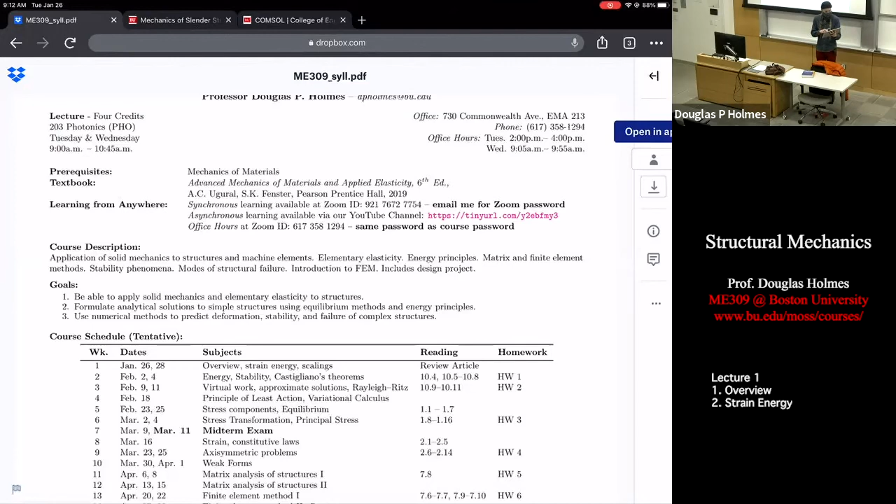The goals are listed here. Here's the course schedule, kind of a rough one, in terms of things might change as I'm shuffling the order. You can see it here, like in the reading listed on the syllabus, it starts out in chapter 10 and then goes back to chapter 1. That seems kind of weird, but there's a method to that madness.

I kind of like the way the class starts now. It helps provide more of a conceptual understanding by using ideas from energy, and how we understand principles of minimum energy, and energy tending towards being a minimum. Using that concept, you can actually do quite a bit.

At the moment, I'm looking at 2 exams, a midterm and a final. There's a chance if I can figure out how to come up with a good project plan, we could switch out that final exam for a project that involves a little bit of math, a little bit of finite element work to kind of tie things together. I'm hoping to get to that point because I think that's a more useful use of your time than an exam.

At the moment, we'll kind of live with this plan of having these 2 take-home exams and some homework assignments throughout. But I'm really trying to see if I can come up with a couple of good projects that could possibly take the place of those. Because I think at this level, as most of you are seniors, I think you'll get a lot more out of doing some math, tinkering with COMSOL, trying to figure out some problem that you're interested in. I just need to come up with some project outlines that are the right difficulty level.

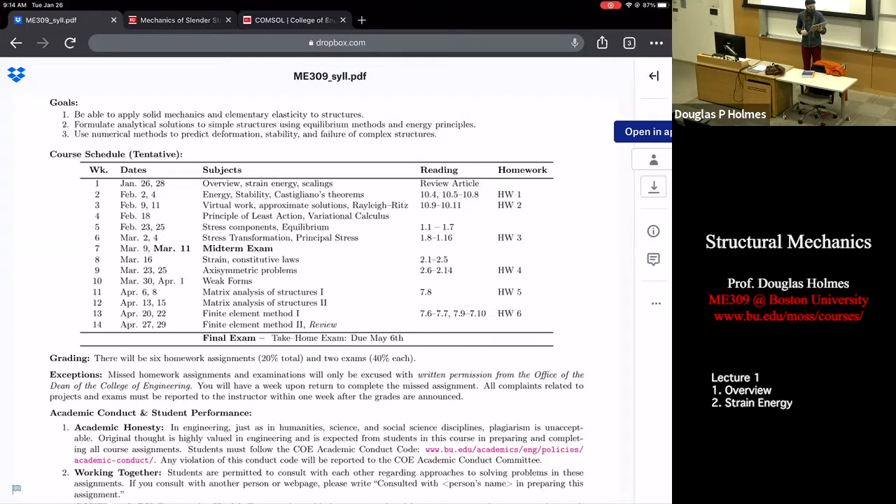All right, let's scroll down here. There's a ton of information in academic conduct, student performance. I feel like early on in your college career, there's a lot of emphasis on just grinding to get the best grades you can possibly get. And I think somewhere from the beginning to the end of your senior year, into your graduate career, there's a mindset shift where you realize, oh man, I gotta know some of this stuff, I want to learn this material. And that knowledge ends up becoming a little bit more important than the grade attached with it.

And I have on here, work together. If you want to work on a homework assignment together, work together. Just let me know that you're working together. I want you to leave this class with an understanding of structural mechanics. That's my goal.

I'm someone who's going to be less of a stickler for grades and more of a professor who's interested in seeing you demonstrate mastery of a topic, or seeing you be aware that you don't yet have mastery of this topic and you'd like to get there, working with me or with your peers to understand what you don't understand yet. I'm still trying to find the best ways to balance understanding that we grade your performance, but in my mind, I really want to see mastery as the goal. I want you to master this topic because that's what's going to be expected of you. If you leave here, you're either going to go to graduate school or get a job, and they're going to say, oh, you took structural mechanics, you know how to do this, and I want you to know how to do whatever that thing is.

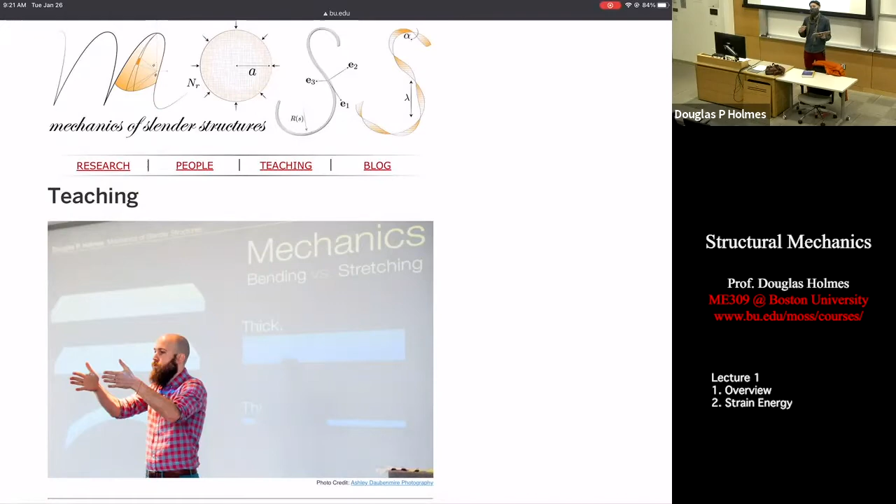I'll put this link on my syllabus as well before I email it out to everybody. I'll try to post things here, including the syllabus, videos from our class—you can get a sense here.

This is from the fall, a different class, but I posted videos and a PDF of the notes I'll be writing on my iPad here. I'll post the PDF of these notes on this website, along with a link to the YouTube channel and some code we'll end up using throughout the semester.

We typically do some stuff in Mathematica. If you've never used it before, I'll give you a little primer on that. And the other thing I'm trying this semester, which could work and be awesome or could be a disaster—we'll find out—is incorporating more work with COMSOL into the class.

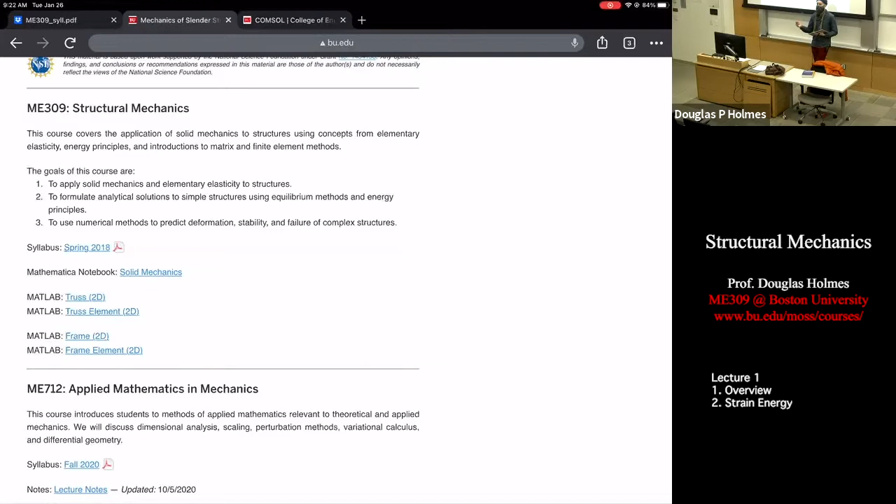I believe all of you can access COMSOL through Citrix. We're in a class, so we have a class license, and I believe the primary one for us would be the structural mechanics module. They're all available, so you can use all of them. Just Google Citrix and COMSOL for BU, and it'll tell you how to access it.

I wouldn't worry about it right away, but this is something I'm trying to build in to give you a little experience analyzing stress within structures using a finite element solver. I feel like many of you have encountered COMSOL in, say, fluid mechanics. If you've never encountered it before, you'll just be a hair behind me—I'm pretty terrible at it but learning. We'll see what we can do to make it a useful tool to help our learning here.

All right, what questions do you have for me? I've been talking nonstop.

So yeah, I know you were talking about maybe changing the final to a project, but it also, in the course description, includes a design project already. So would that be two projects? No, it would just be one.

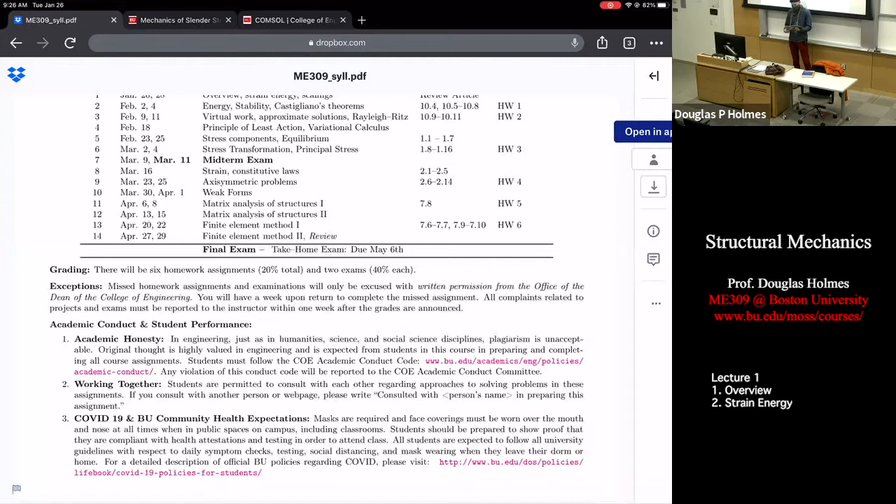How similar are the exams to the homeworks? That's a good question. I would say pretty similar, although the homeworks tend to be very technical - here's a structure, here's the loading, calculate the stress in this direction or the deformation here. I usually try to add some conceptual questions to the exam, to get at what do we mean by this concept, what happens if we were to change this to that, how would that qualitatively change it. So the homeworks are typically entirely quantitative - calculate a stress, calculate a deformation. The exams, I do a mix of that with some conceptual questions. So fairly similar, but I like to be able to ask about conceptual ideas on these exams, because I feel like that is, in a lot of ways, more important than the kind of technical calculations. So that's a good question.

All right. So I feel like I've given you already a little bit of a sense of what is structural mechanics. It sits somewhere between mechanics of materials and linear theory of elasticity. Typically, what we're thinking of when we think of structures are three ideas. We're typically thinking about trying to analyze their strength.

Strength is typically a material concept. It's saying, if I apply this much load to this object, we know from mechanics of materials it's going to lead to the structure itself building up stress within there. And then we also know that there's some ultimate stress at which this structure will start to fail. Maybe it'll yield, maybe it'll fracture, but there's usually some sort of material limit to the amount of force you can apply to an object. So this is typically characterized by how well that material resists permanent deformation.

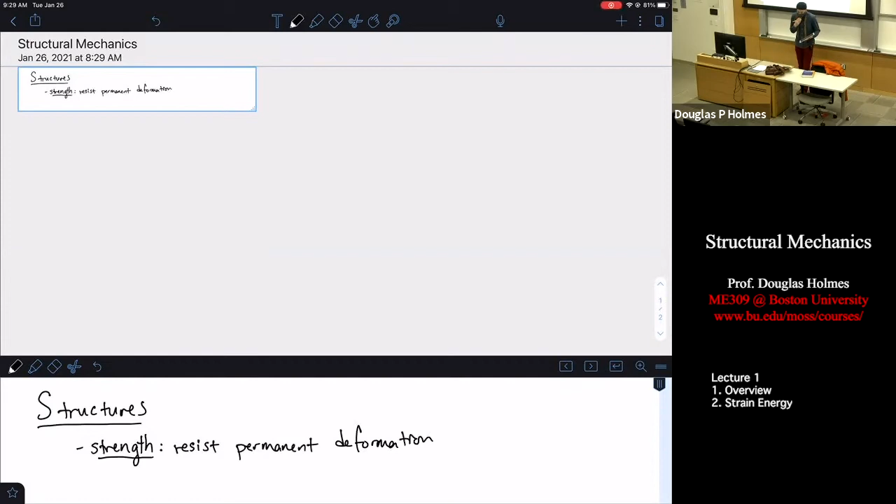You usually see permanent deformation, something like plastic yielding, or brittle fracture, etc. And like I said, these are typically something that emerges from the material properties. The material, we would say, behaves elastically if under that loading it doesn't exhibit any permanent deformation - or there are more complicated ways to make that distinction. But for right now, think of it like a spring: if I pull on it and let it go and it goes back to its original state, it deformed, and we'll say it deformed elastically in that process.

That distinction is kind of important, because the other two things we think of when we think of structures are stiffness - this is really a measure of how the structure resists deformation, or in some cases deflection. Kind of the same word, but usually used in slightly different contexts. You can see that in the stiffness case, really we're talking about shape changes, deformations. So the stiffness of a structure is typically related to the geometry, and in that case, the linear behavior of the geometry.

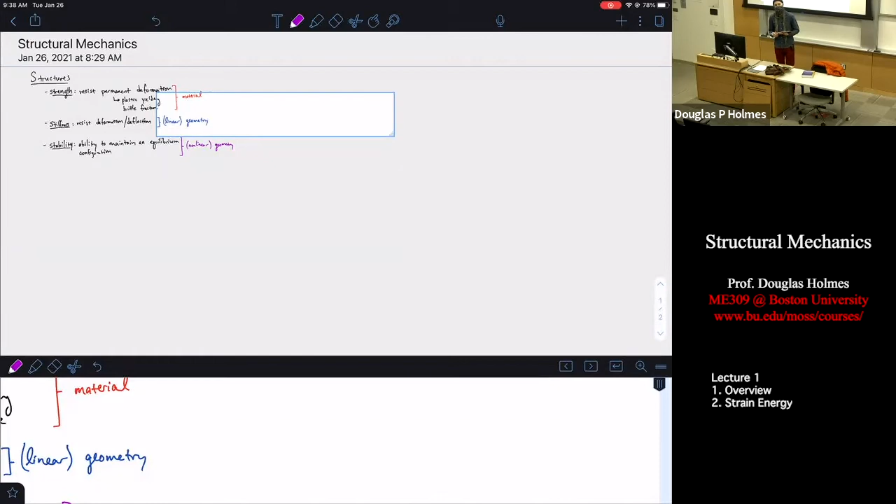There's typically two ways that we can evaluate these properties of structures. They're equivalent, and depending on the situation, depending on the problem, it might be advantageous to use one approach over another. These two approaches...

One of them is pretty familiar - it's the stuff that's been beaten over your head for the last 2.5 years of undergraduate career, which is the method of equilibrium: sum of the forces equals 0, or sum of the forces equals mass times acceleration. We can use that, draw a free body diagram, calculate what the force is or what the stress is. This is referred to generally as the method of equilibrium.

We typically have - there's technically 4 sets of equations, but we generally ignore the 4th one until you're at a really advanced graduate level. So the 3 others are equilibrium equations - that is what I was just saying, those are your sum of forces equals 0.

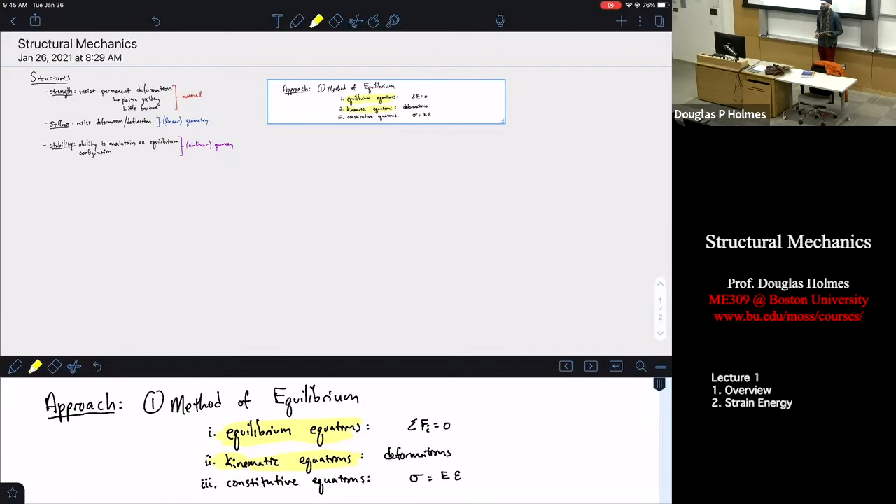I think it's vital for you to learn all these things, and we will a little bit through the semester. But I want to introduce you to something that's probably a little less familiar. And this is a second approach, which are all based on energy methods.

I was not trained as an engineer. I was trained as a scientist, and trained as a scientist, you're very comfortable thinking about the concept of minimum potential energy. We always think about energies. We think about free energy. We think about the energy in a gravitational potential, energy of a molecular bond forming or breaking. And what's nice is that these methods are equivalent. They're really connected. And you're going to see that we can use the energy methods to derive the equations of equilibrium.

They're very equivalent methods, but they each have their own advantages and disadvantages. For the energy methods, it becomes, in my opinion, easier to start to estimate what's going to happen, to start to approximate a solution. If you can't solve it exactly without going to a finite element solver, maybe we could approximate it and see if this is a reasonable structure that we're designing here.

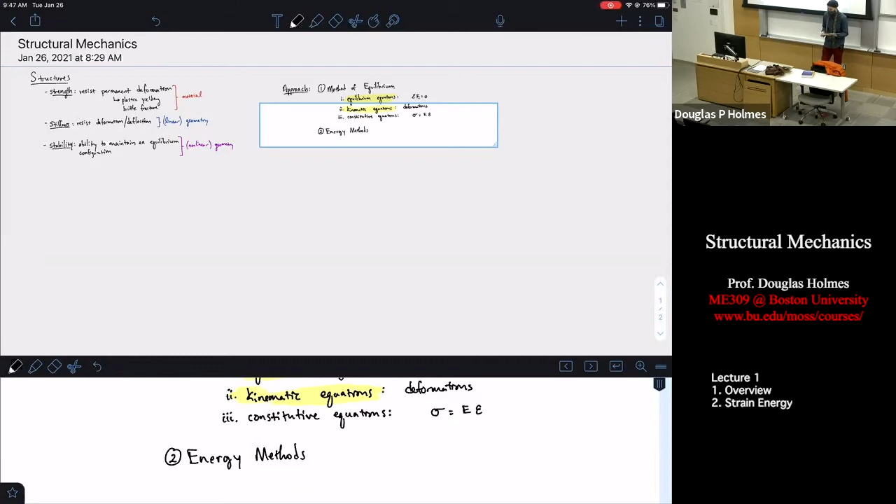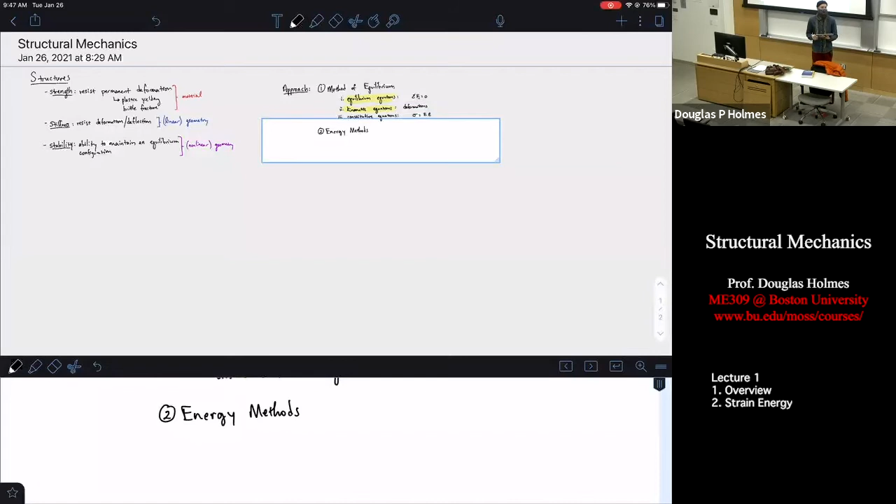I really like these methods because I find them to be fairly intuitive. Now, that intuition doesn't come immediately, so it'll take some time to get used to it. But I do believe that using methods from calculating the energy of a structure and calculating the work trying to be done on that structure, you can start to learn a lot about how that structure is going to behave.

And so this will require us to introduce the concept of strain energy, which is in your Mechanics of Materials textbook, but I would bet a lot of money that your semester ended before you got to that chapter. So I think we're going to start there with this class and see if we can use that as a tool to at least get some conceptual understanding of how structures behave.

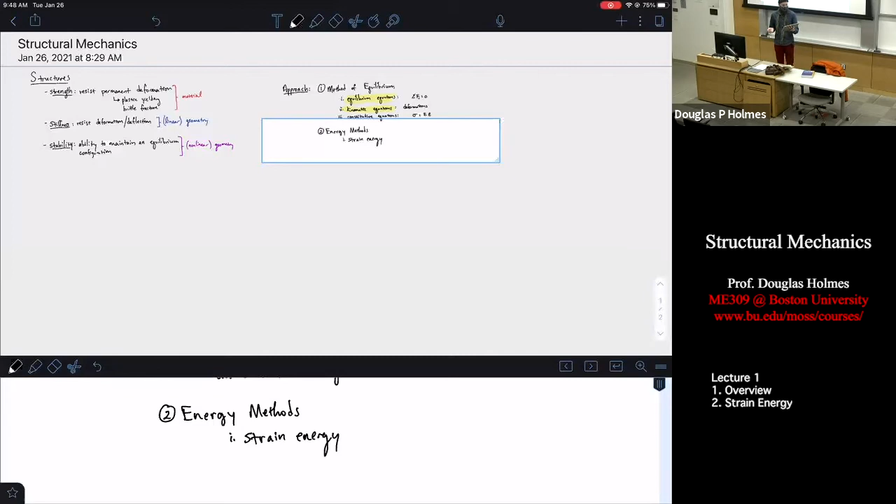So this is kind of the outline for the whole class, or at the very least, these are the topics that are at the heart of structural mechanics. We need to know about the strength, stiffness, and stability of our structure. And there are two ways to do it: we can either use methods of equilibrium or these energy methods. They're complementary, they are equivalent, they just require different tools, and we'll be bouncing back and forth between them a bit through this semester.

And so this, in a sense, is really like the kind of overview for the goal of this semester, of this term.

I think another thing that gets lost when teaching structural mechanics is we spend a lot of time talking about beams, and there's a little bit of like, why are we always talking about beams? I want to point that out at the beginning by saying structures are generally kind of assemblies of, let's say, three types of components.

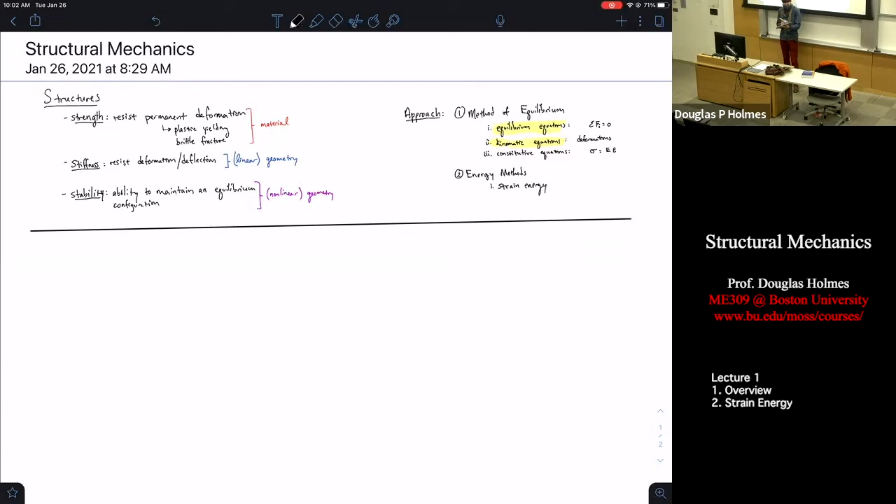For reasons no one quite truly understands, everything in the universe tends to minimize its action. What is its action? It's the integral of the energy over time. In structural mechanics we often ignore one half of the energy, but there are two types we're used to thinking of: kinetic energy and potential energy. For structures that are not vibrating or oscillating or experiencing any inertial loads, you can learn a lot just by evaluating their potential energy, because of that statement about minimizing action, which we'll talk about in several lectures from now.

In the absence of kinetic energy, that statement reduces to something much simpler: if you want to know the shape of an object being deformed by some loads, that shape will be determined by whatever shape minimizes the total potential energy of the system. So the shape of a deformed object—let me write it a different way—the nice thing is that if we can write down total potential energy, energy is a number, right? It's a scalar.

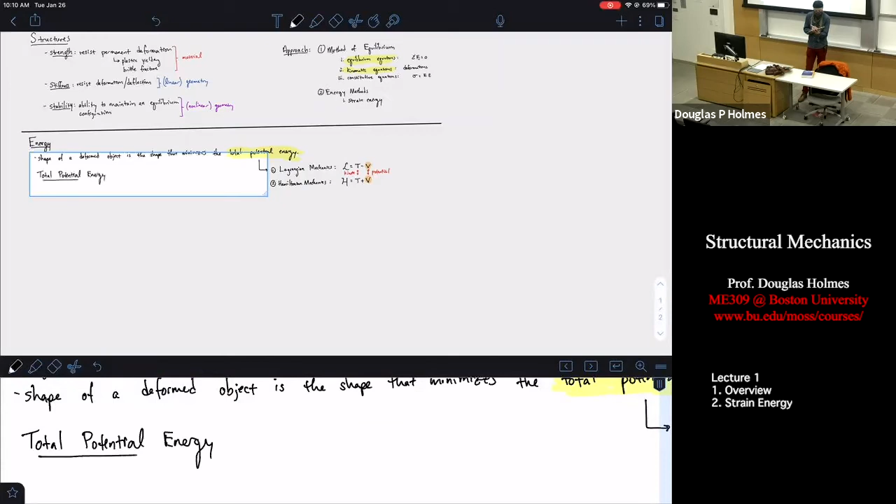And it goes back to this statement: the shape of the object is going to be the one that minimizes the total potential energy. So what's the total potential energy? The total potential energy for an elastic object is composed of the internal strain energy, which we usually write with the letter U, and to that internal strain energy, we're going to add any potential or potentials from external loads.

The strain energy is like the energy in a spring. It's like if I push on a spring, how much energy am I storing in that spring? And if I let go, that energy is going to be released. The external potentials are going to be, what work am I trying to do on this thing? I'm pushing with some force and causing some displacement. That's going to give me a potential to do that work that you're trying to do.

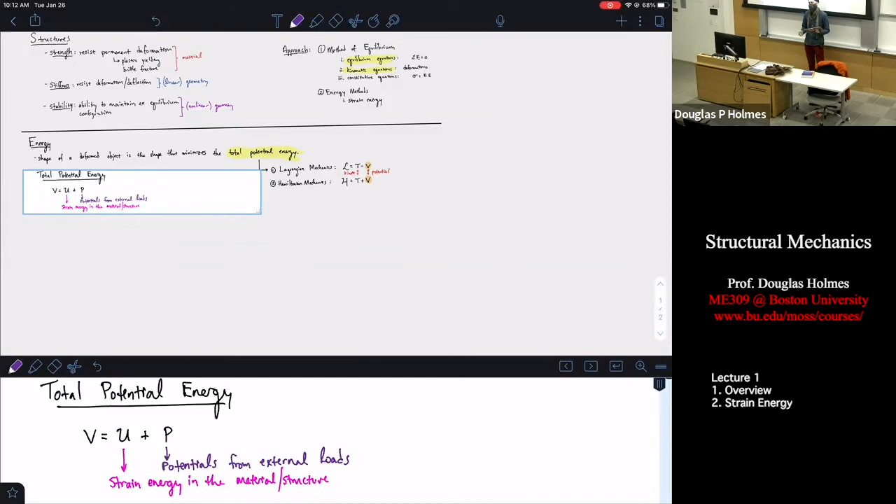So if I want to calculate the strain energy of an object, a three-dimensional blob of something like Jello, what I do is take the stress in that material and multiply it by the strain, and I integrate that quantity over the volume.

Why do I do that? Well, this is strain energy, so the stress has to be coming from deformation in this object. So there's this coupling of stress and deformation.

But also, if you just quickly do dimensional analysis on this, the units of stress are what? Who remembers? Pascals is right, and pascals are Newton per meter squared. So if you think about pushing on a bar, you have a force that you're applying, and you have to divide that force by the cross-sectional area that it's being exerted over. So you end up with a force per meter squared, which is a Pascal. So we'll write this down as Newton per meter squared, which is also equivalent to a Pascal.

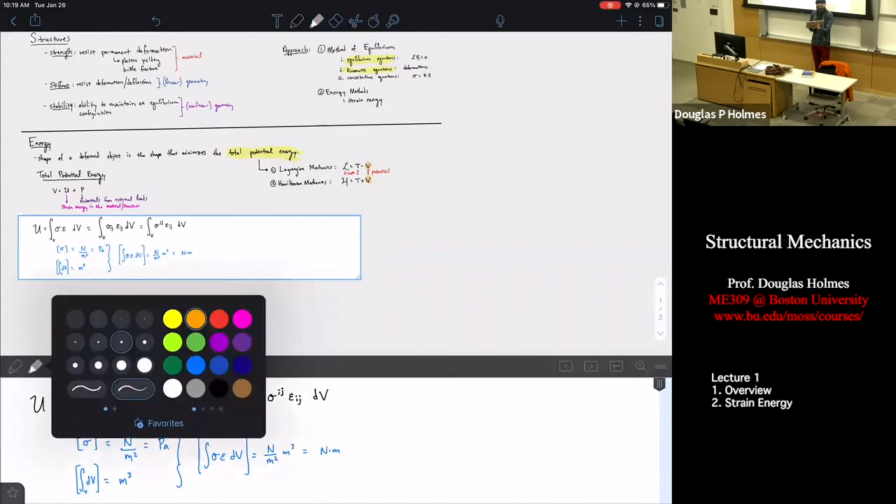There are general ways that we handle this, but for right now I'm showing you this just for curiosity's sake. We're going to see that we can do quite a lot with just this simple conceptual understanding of strain energy being the stress times the strain integrated over the volume.

So we've got half of it done, right? We've now got U, and now we got to handle what the potentials from our external loads are. These can take on a variety of forms. Again, the notation here is not important, I'm going to write down some notation, it will probably be messy to some degree. For right now, I don't want us to focus too much on the notation. What I want you to know is a couple of things. One, let me write strain energy up here.

So this is our strain energy, and we'll go over here and denote the potential.

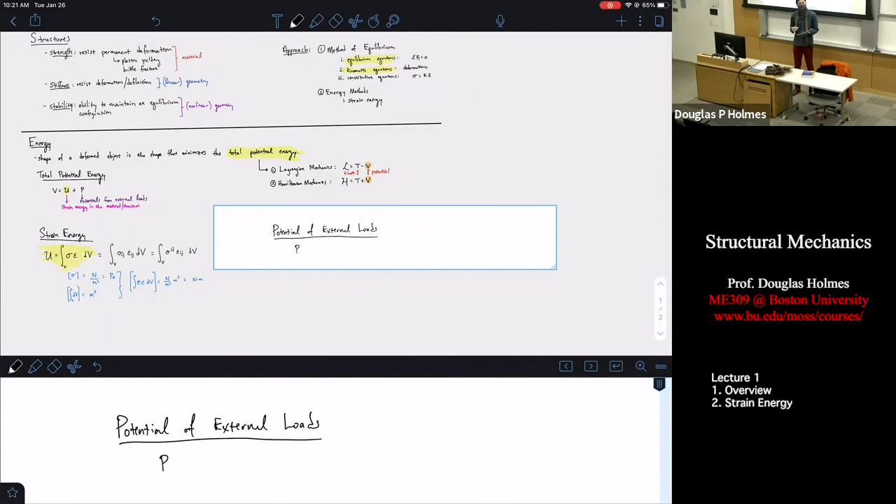Assuming the external forces don't change as the object is deformed—this is a big assumption, but it's one that most people use because the problem becomes immensely more complicated if the forces do change with deformation. Then, if these forces don't change during deformation, what we can say is that the potential of the external loads is equal to the negative of the work.

I'm guaranteed to mess up the signs on this at some point during the semester. I'm terrible with signs and factors of 2, it's just one of the things you'll come to learn about me, but I'll do my best not to confuse you too much. The potential of the external loads is the negative of the work being done by an external force. We know work is, say, force times distance. And so we can look at an increment of work.

You probably learned about the concept of virtual work, maybe in statics. We'll dive into virtual work again, so there'll be a hearty refresher on that. But for right now, I'm just going to look at it in an infinitesimal way and say that the small change in work, delta dW,

is going to be equal to my force that I'm applying. Depending on which notation you use, you might denote this as a vector with an arrow, which is dotted into some distance. We're in an infinitesimal amount of work, so the force would be dotted into an infinitesimal displacement. We're going to call our displacements

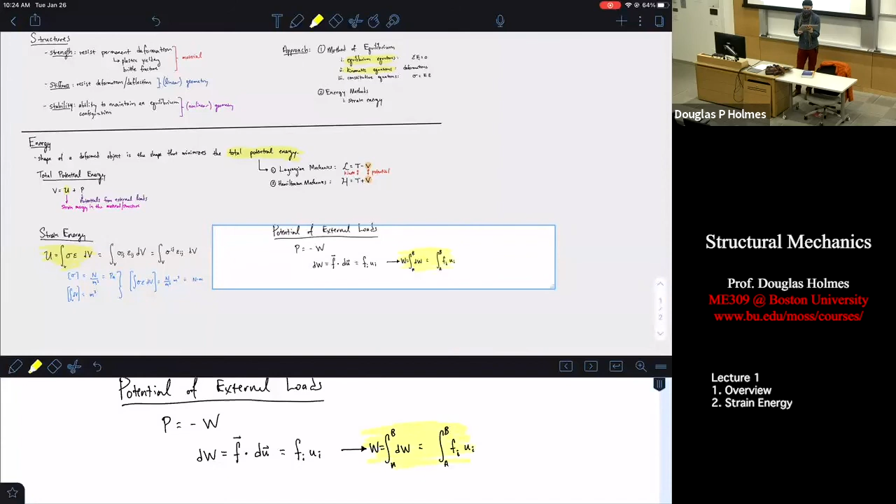and now forces can take on all sorts of different types. So this is in general how we would handle work. But sometimes you have what are forces distributed over a volume. What does that mean?

If I have a volume here, why is this thing deforming? Gravity is acting on it, right? Gravity is acting on it. Gravity is a force that's acting on the entire volume of this object here. So this would be an example of what's sometimes called a body force, or a force acting on a volume. The other common one you'll see is magnetic forces—bring a magnet here, and the magnetic potential is going to act on the entire object. So you might have, for instance, forces distributed over volume.

And it'll look exactly like what I just wrote: W equals the integral over the volume of my force vector and my displacement vector, dV. I'm changing notation here, but that doesn't matter. I'm not interested in you focusing on notation right now. I want you to know conceptually that a force could act on a volume.

Or this book sitting on this table is exerting a force on the table, and it's exerting that force over some surface area. So there's some area of the book here. This force has some weight, and that weight is pushing on the table. If you're modeling the table, that would be a force acting over some surface—not the entire surface, but some portion of it.

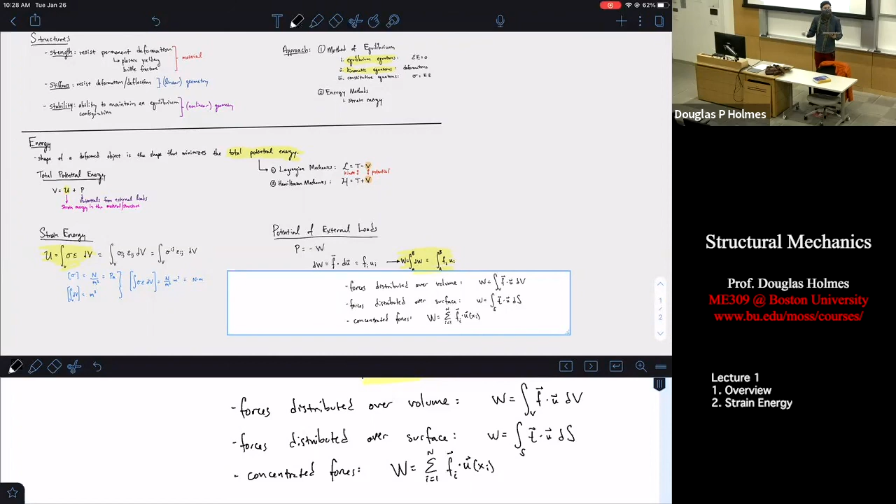The mathematical form isn't really important right now. The conceptual idea is I have strain energy, which is the integral of stress times strain over the volume, and I add to that potentials from external loads. Those external loads do work. The work is equal to the negative of the potential, and the potential is equal to the negative work. The way those forces do work depends on the nature of the force. If it's a force per unit volume, you integrate over the volume the force is acting on, which is the magnitude of the force times the displacement.

They can be forces per area, or concentrated forces at different points. So our goal for the next class is to give you some really simple examples of how we calculate strain energy, how we calculate a couple of different potentials from external loads, and how we get a conceptual understanding of what it means to balance and minimize these energies to find deformations.

So what we'll do going forward is dig into this equation a bit more. It turns out we can split up the strain energy in our object. Think about mechanics of materials: we always said you have energy that goes into stretching or compressing an object, energy that goes into bending an object, twisting an object, and everyone's favorite, transverse shear stress in a thick beam.